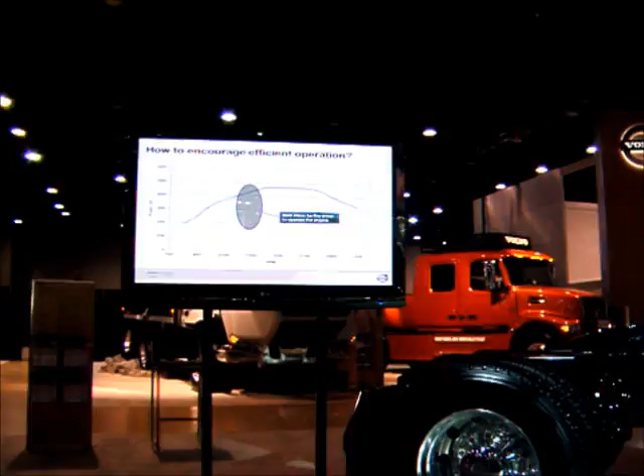This is what I wanted to share with you. The overall engine curve gives you the big picture, and the driver uses that through accelerating through the gears to get up to speed. When he gets up to speed, where we want him to be is right here, in that sweet spot, cruising along. Over the years, everybody's come up with different software techniques to do that.

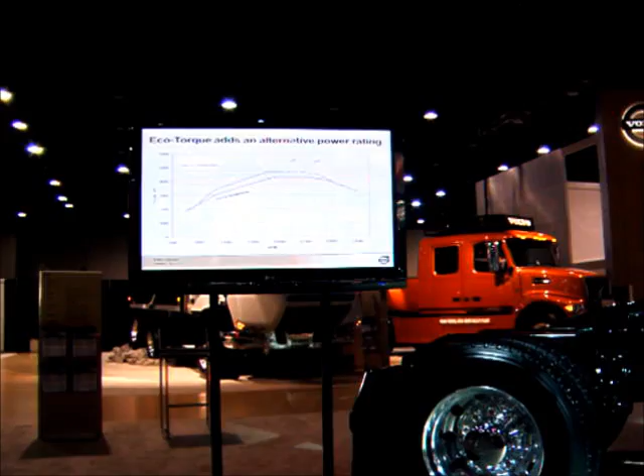What I've done is share with you lines of constant power, drawn horizontally, and lines of constant torque. You see that above about 1,500 RPM, the engine is operating in an area where the horsepower is essentially constant, which is great for accelerating through the gears.

When you get up in speed, you're in this sweet spot, which we're defining now as 1,200 to 1,500 RPM. Further than that, we use a road speed limiter to limit the top speed to, let's say, 65 miles per hour.

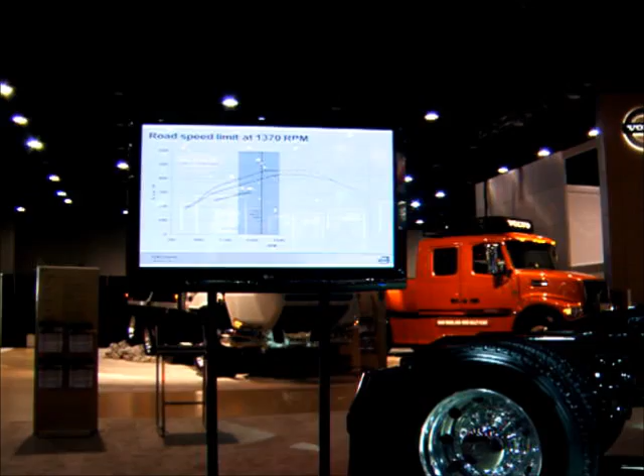I want to draw your attention that our recommendation, since we've come out with the 2010 engines, is a little bit less than we had with 2007. We recommend, and have recommended, that our trucks operate at 1370 RPM at cruise.

That's 65 miles an hour, and it sounds like tall gearing, but it really works well. So that's how we've boxed this down so far. Now let me show you what EcoTorque does.

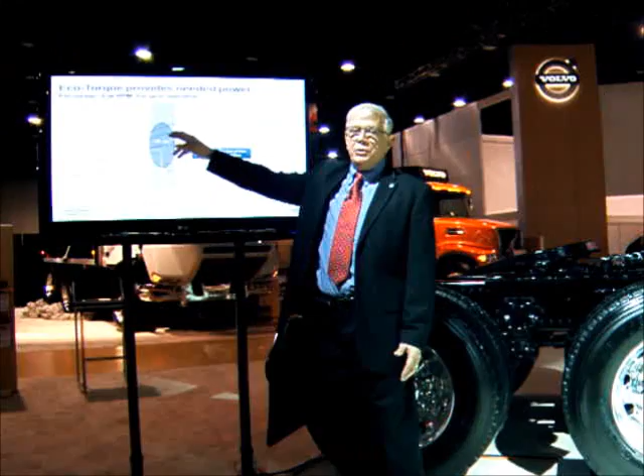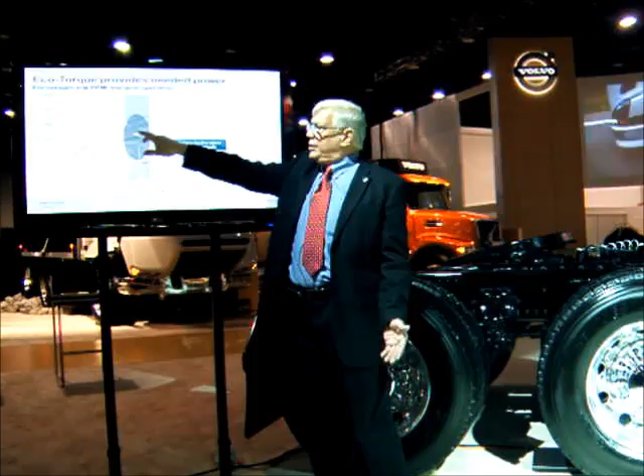EcoTorque gives a dual personality feature, a multiple personality to the engine. What's unique about EcoTorque is it's very intuitive for the driver to use. Keeping in mind that in top gear, he can't use anything up here, he's really operating somewhere at 200 horsepower at cruise and up to this 1550 torque level on this new rating.

If he hits a grade and it slows him down below 1,300 RPM for about 4 seconds, it flips to the higher torque level and stays there until he goes downhill.

The important thing, once again, is that EcoTorque works, it's intuitive, the drivers know it and feel it, they like to use it. They learn quickly that if they downshift too early, they'll never see that higher power curve. The only way to get it is to lug it down.

This is the training we do, as the driver drives, to keep him in top gear, and he comes to realize that with a rating such as this 455 with 1750 torque, it's a 10th gear truck. He'll stay in 10th gear for most of the operation on a typical interstate.

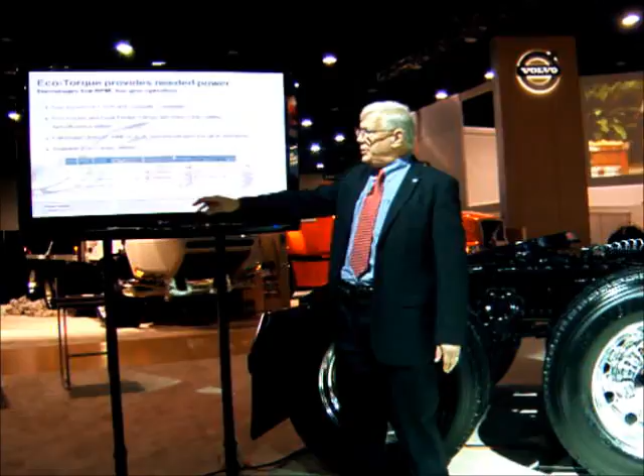You can see now that of the 22 ratings we now have in our Volvo engine line, which I'm very proud of, 10 of them are now EcoTorque or dual torque.

What's the difference? Dual torque is only for certain vendor transmissions, for example some direct drives that don't allow you to use the higher torque in all the gears, and that's the reason for dual torque, available only in the top two gears. Our EcoTorque feature is available on our iShift and many other vendor manual transmissions, where the full torque is available in all gears, giving the driver better performance in the mountains.